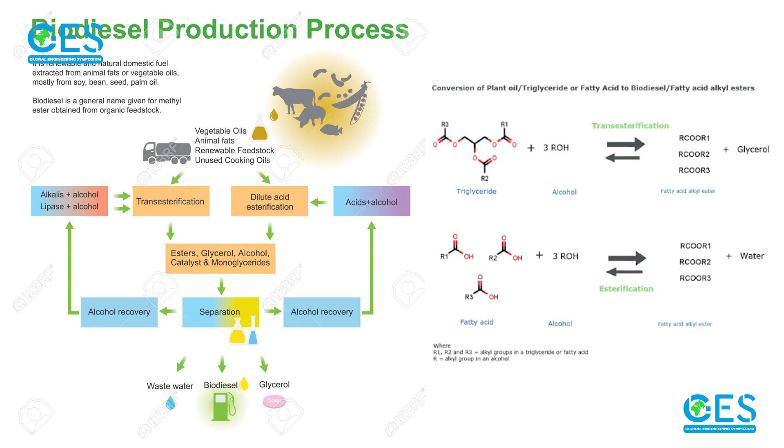And now let's go back to biodiesel production. Why biodiesel? I just said it is greener, and we need greener products to save the environment, as Enver gave his message about the environment. You can see the chemistry here. I am not going to bother you with much chemistry. I know not many people love chemistry, but what's interesting is that at school, we know that this is the chemistry to produce, let's say, biodiesel.

We just write it on one sheet of paper. But when it comes to industry, it is not that simple. There's a lot of work that should be done. And this is the process for biodiesel production. How terrific and scary is it, right? So basically, if you are not a chemical engineer or process engineer, it is really hard for you to understand this scheme. But we are engineers.

We don't memorize, but we can solve the problems. We should also make the problem simple for others to understand it. So from now on, we will all be process engineers and construct this process flow diagram together.

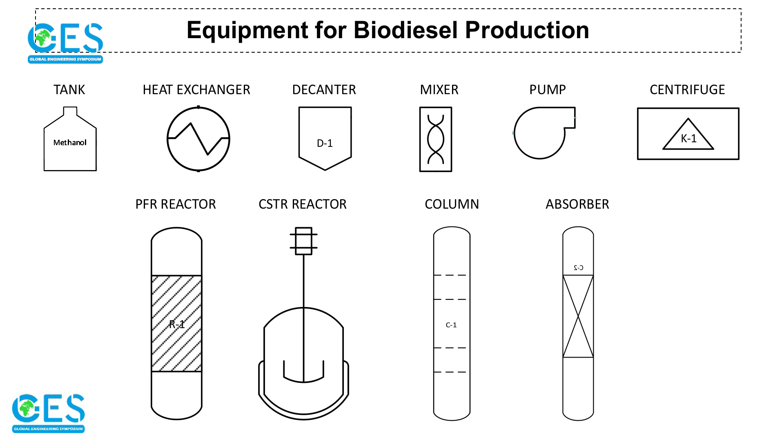To construct it, we need blocks. Which blocks? Tank, heat exchanger, decanter, mixer, pump, centrifuge, reactors, column, and absorbers. You know that we will use this equipment to construct our process flow diagram. If we think about what we need and what we are going to do, we can construct the PFD together, and then it will be really easy for you to understand it.

Okay. We need raw materials. Raw materials for biodiesel are oil, fat, and we also use the methanol. And then we know where we are going. We will start from here and we go here. We have biodiesel, which is our main product, and the glycerol, which is a byproduct, but it can also be sold.

Okay, next step after the feed section is a reactor. We have a reactor, and to start the reaction, we need certain temperature and pressure. Then, obviously, we need the pumps to increase the pressure for the raw material coming from the tanks. Before the temperature, we have a mixer, just to be sure that our raw products mix well.

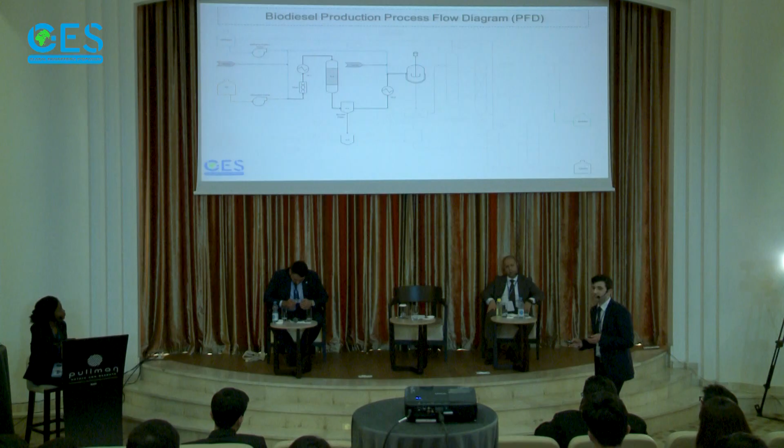But that's not enough for the second reactor where we have the trans-esterification reaction to achieve the biodiesel. We need more raw material, methanol, so it comes from here, and we need more catalyst here. When we send all of them to the reactor, this type of reactor is called the CSTR, which is continuous stirred tank reactor. Then we have reaction in there. We have our product. Again, it's a mixture. We have to separate it.

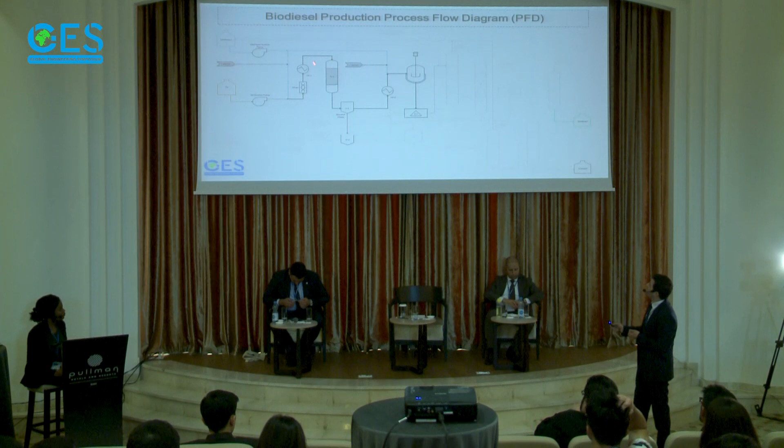To be able to separate it, we need to send it to the centrifuge. So process engineers know that they have to separate it, but it is important to select which type of separation you need there. Basically, if you look at the scheme, we have a reactor here, we have the reactor here, and the rest is separation. There are so many columns and different separation techniques used. So you should know the technology and apply it in a correct way.

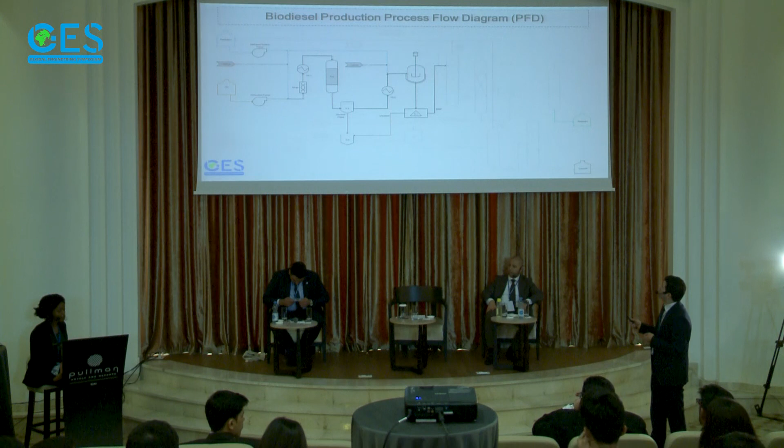Here we again separate the glycerol and then send ester to the column. Separation is basically a physical separation. So you know distillation, but in distillation columns it is more complex. You can get several products here. And then you have a distillation column. For gravity, you know that you will get the lighter product from the top and the heavier product from the bottom.

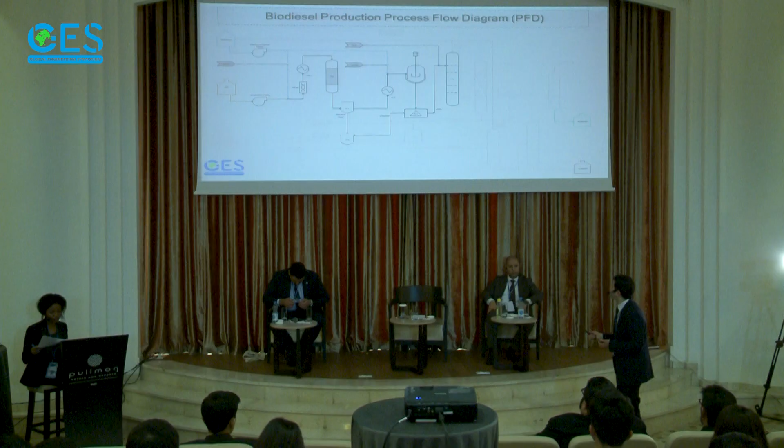Okay, we have recycled methanol. We should use a lot of methanol in order to have a fast reaction. But if we use more methanol, we will have more methanol mixture in the final product. But we don't want to lose it. We can just basically recycle it and reuse it.

The bottom product, crude biodiesel, is sent to the absorption section. In absorption, if it is a gas, of course, it enters from bottom and it will go up. Then we can use water to wash it. Water will wash it and take all the impurities with it and leave from bottom. And then we have a pure, cleaner biodiesel, which is called a wet biodiesel.

Why wet? Because we have water in the biodiesel. Then we still need to separate that water from biodiesel. Again, we can use a centrifuge to separate it. And then we have the mixture of the glycerol, methanol, water from the centrifuge. Now you see that we take the glycerol phases from different separators and then we collect them here.

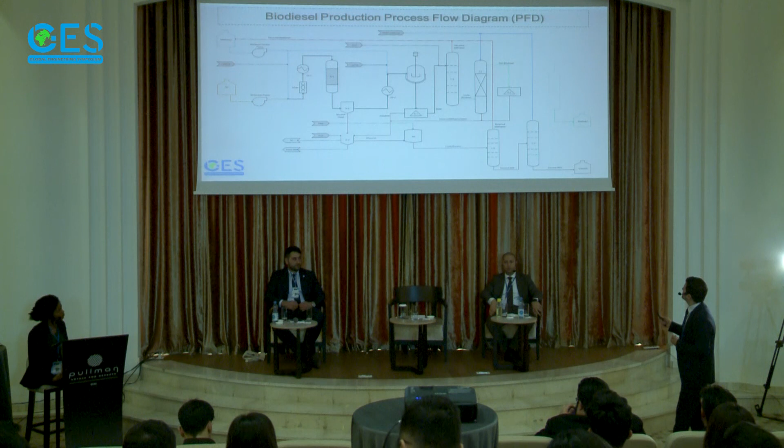It is sent to the evaporator, and using the vacuum, we can evaporate all other impurities, and then we will have the biodiesel in the end here. So I hope now this process scheme is clearer for you, because we tried to construct it together. In reality, this scheme is much more complex. You have a lot of equipment, hundreds, maybe thousands of equipment. You should know which one to choose and where to put.

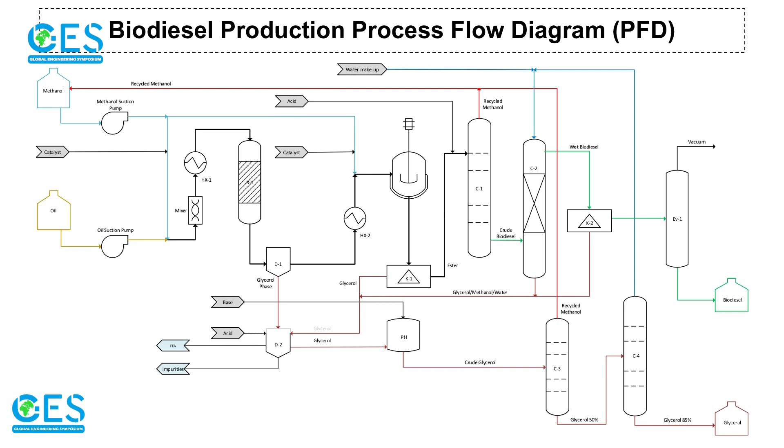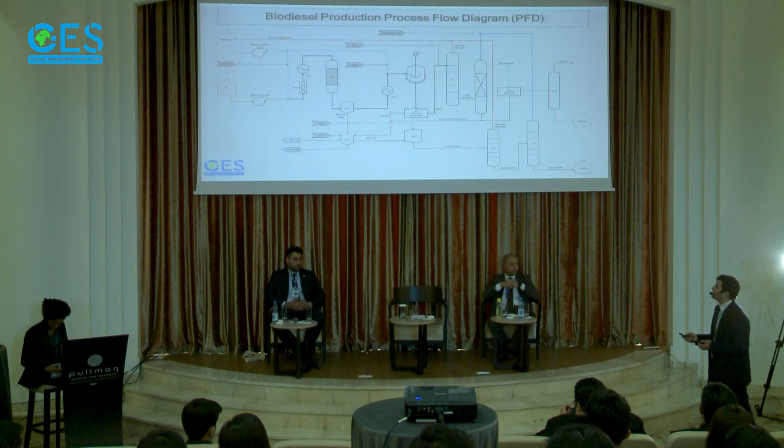But that's not all, because that's only one frame from process engineering. You see, there are a lot of different types of jobs that process engineers do, such as doing simulations, doing the material balance, the heat balance, detailed engineering. You have to size all these equipment. But before doing that, I would advise the young generation of process engineers who are maybe still students to learn this equipment. If you know how this reactor works, how this column works, you will know in future where to put it and how to use it.

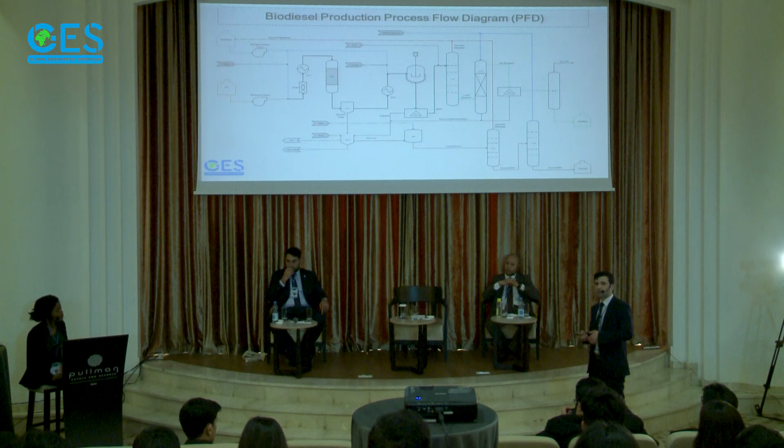And then, of course, math is essential for all types of engineering. You should be good at math. Probably some calculus you may need in future, especially if you want to continue in research. So these are all different types of work that process engineers do. Machine learning, electric technology, you should work with software, robotics is coming to our new life, network solutions.

And then, just one more example that Dr. Baraka said in his presentation, there's processing in mining engineering. So process engineers actually can work where there is a process. If there is a process, you need process engineers to operate them, to handle them.